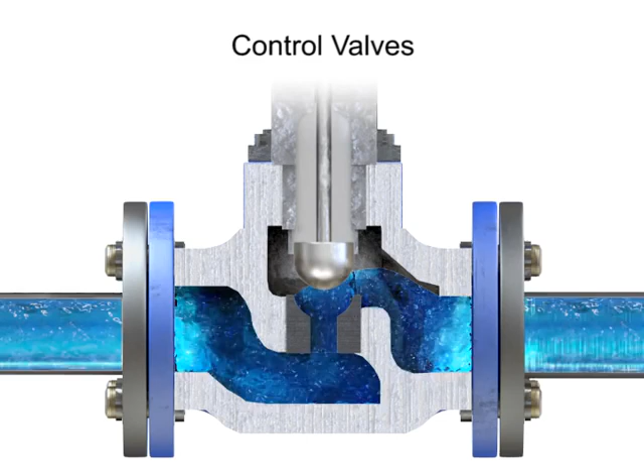Control valve actuators control fluid in a pipe by varying the orifice size through which the fluid flows. Control valves contain two major components, the valve body and the valve actuator.

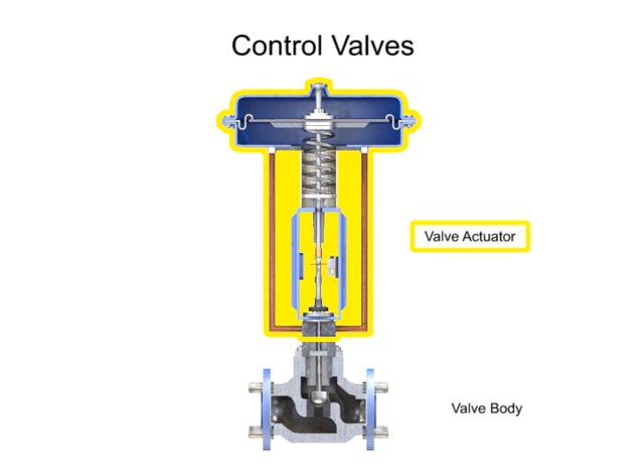The valve body provides the fluid connections and a movable restrictor comprised of a valve stem and plug that is in contact with the fluid that varies the flow. The valve actuator is the component that physically moves the restrictor to vary the fluid flow.

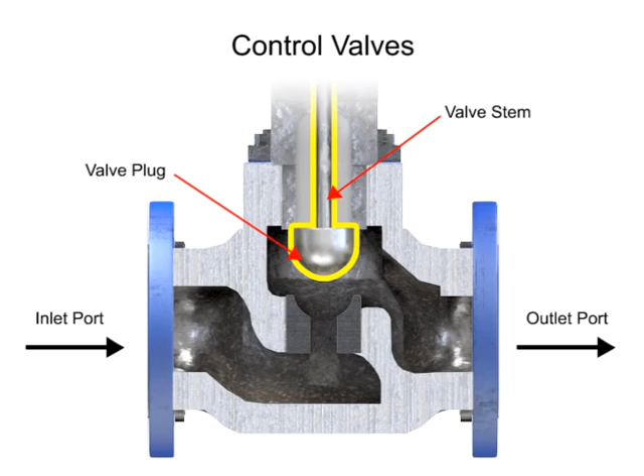Three actuator types are used in control valves, and they include spring and diaphragm, solenoid, and motor. As the name suggests, the spring and diaphragm actuator uses a spring and a diaphragm to move the valve stem and plug.

A 15 psi pneumatic signal enters the housing at the top of the actuator. As pressure is exerted on the diaphragm, a downward force is applied against the spring, which moves the restrictor. The diaphragm moves until it creates an equal but opposing force against the spring, at which time the motion stops as the plug meets the valve seat. With no air pressure, the restrictor is pushed upward by the spring to act as a normally open control valve.

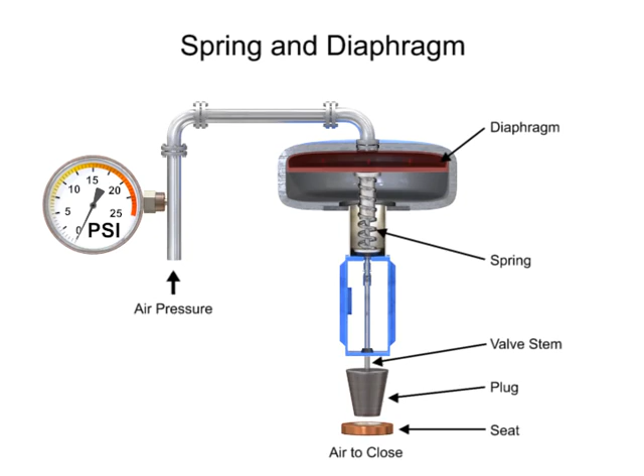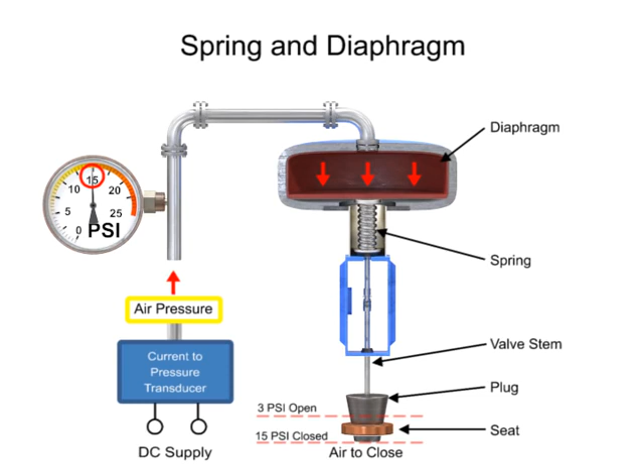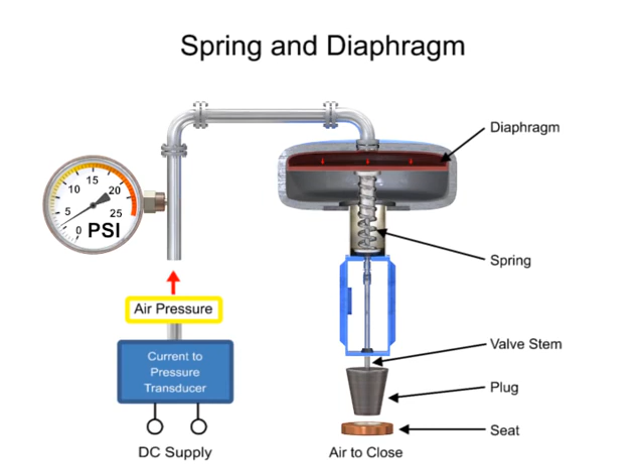To vary the position of the restrictor and flow through the valve, a current-to-pressure transducer can be used to provide a 3 to 15 psi signal to the diaphragm. At 3 psi, the valve is maintained open, and at 15 psi, the valve is maintained closed. Pressures between the 3 to 15 psi range proportionally change the flow of the valve. For example, a pressure of 9 psi applied to the diaphragm moves the spring and valve stem to 50% of operating range.

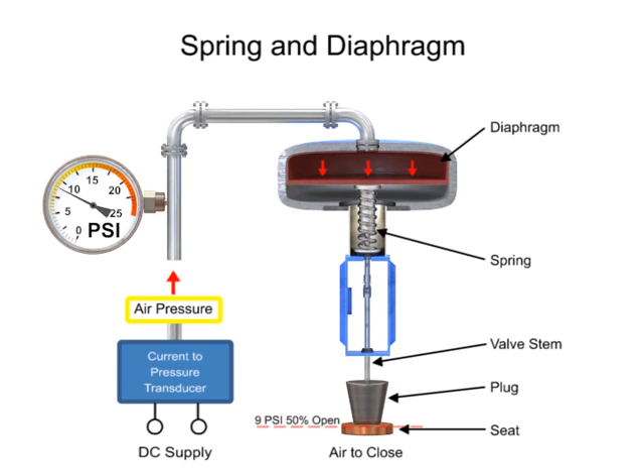For on-off control of the valve, a solenoid is used to actuate the valve to a fully closed or fully open position. Applying current to the coil generates a magnetic field that moves the plunger downward against the return spring. With zero current applied to the coil, the spring pulls the plunger upwards to the fully open position for a normally open state control valve.

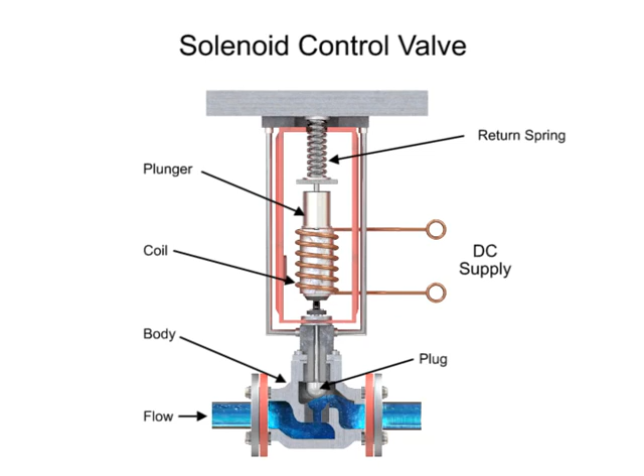Another method for variable valve positioning uses a motor and is referred to as proportional control mode. Using a gear motor attached to the valve stem, a servo amplifier provides a DC control signal that moves the valve to the desired position. Feedback is achieved with a wiper arm attached to the valve stem that sends a signal back to the servo amplifier where the position is monitored. The servo amplifier drives the motor until the control signal is equal to the feedback signal.